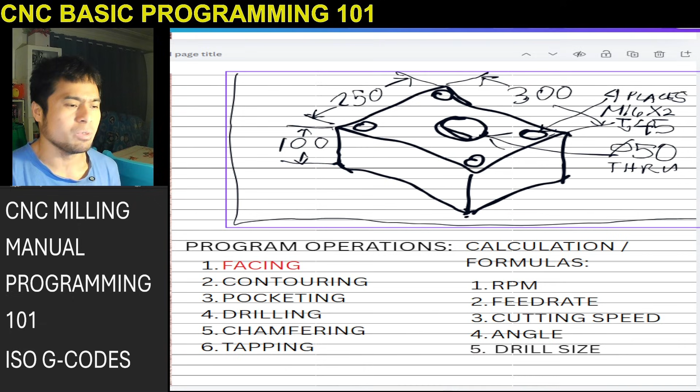I just found out that when you're just starting, it's hard to ask actually, there's nothing wrong in asking, but it's hard to ask your fellow machinists all the time because first we have a target or quota in our production, and there's no time to always ask your colleagues. That's why I find these ways to share this knowledge at least to anyone who is willing to learn about CNC machining. I just strived that time to really learn how. When I was starting, I just really had to find my own ways to learn CNC machining. I would say like that.

That's why when I have this kind of willingness and spare time, I really started to share this kind of information so that those machinists who really want to learn CNC machining or programming, at least we have this kind of information in the internet. And that's why I share it, like I'm putting myself in the place of someone when I started also 20 years ago. So that's why, as long as I can, I use my own terminology so that they can also understand this kind of knowledge. That's why some of the terminology here I use my own, because I'm just thinking, as I explained in my previous videos, that I'm imagining there's a new machinist coming into the workshop and you will teach him about the machine controls and especially the program. So that's why this is how I teach someone who is just new in the workplace.

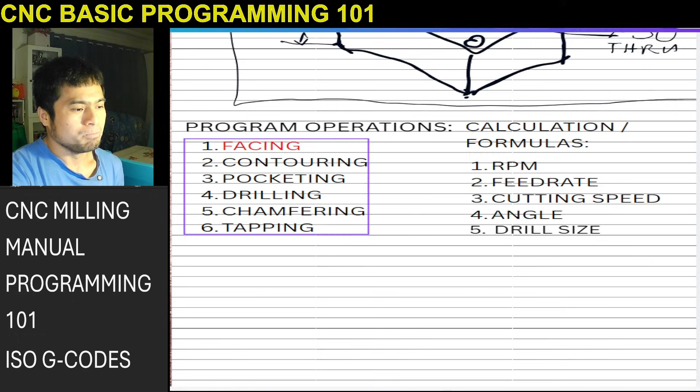So let's go back to our tutorial for today, which is contouring. Since we already tackled some of the program functions, codes and characters, I just did an initial format. Just to recap from our first video, which is the facing operation, this is from block number 1 up to block 25. That is our full program to face this kind of material, 300 by 250 by 100. That's why I labeled it N1, which is facing operations.

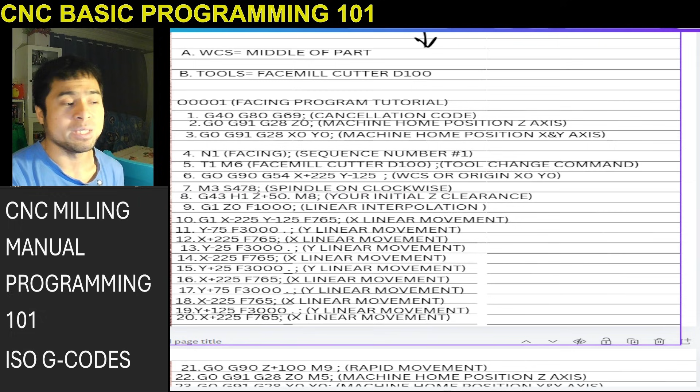So now, if you will do the next operation, which is contouring, you will just insert it onto the bottom part of this one. The M30 is supposed to be removed. Then you will insert the next contouring operation. That's why I labeled it this way, I just copied the drawing so it's already there. It's hard to scroll back again to the very top of the page, so I just copied that one there. Now, program operations episode 2, which is the contouring operation.

What is contouring? Contouring is, after we face that material, simply cutting that width, the 300 by 250. Because of course, when the material comes, there's always stock around the material. For example, if this material is supposed to be 300 by 250, that is not exact. It's always a material stock from the cutting process. So probably that is 310, this is probably 260, ideally, for that kind of material.

So there's always stock, even to the thickness - if that is supposed to be 100 thickness, it's not exactly 100. It's 105 or 110, like 5 mil each side, ideally. That's why the contouring operation is finishing that square, the outside part of that part, to target that dimension, 300 by 250.

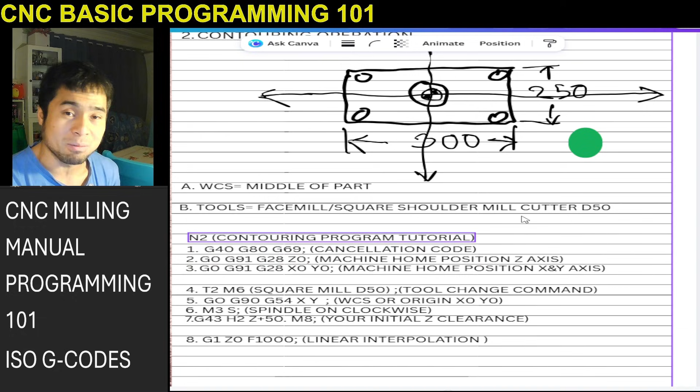Okay, so I already typed some of this first, because we've discussed this in our first tutorial in the facing part, which is episode 1 of our tutorial. So I just put it right away. I put N2 and labeled it as contouring program tutorial, because this is our tutorial, but you can put anything - contouring operation or whatever detail you want to put there, just to know that this part is contouring.

N2, which is the sequence number, we have already discussed that one. Sometimes if you reset your machine and want to jump right away to the contouring part - of course, when you finish your facing operation, which is this one from N1, when you reset your machine and rerun the contouring, you will not run again from facing. You just want to jump right away into the contouring part. That's why, to jump to this side, you can use N2.

You can use N2, which is the sequence number 2. That's one of the uses of N2 - you can just search N2, then jump right away here, and skip the facing operation.

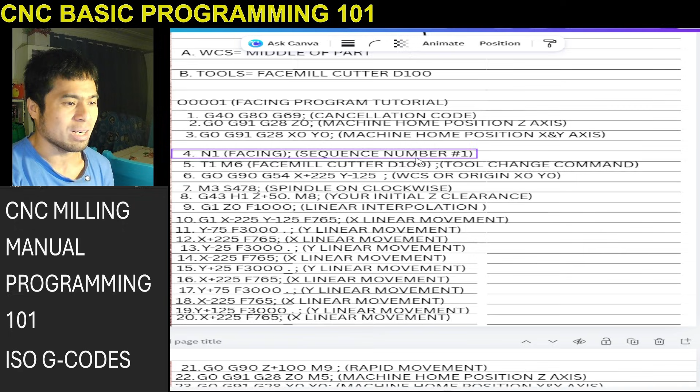And G0, G91, G28, X0, Y0, home positioning. Now, because tool 1 is our diameter 100 face mill used in our facing operation - if you remember, this is tool 1, face mill cutter 100, that one in our facing operation.

So now we will use our tool 2 as our square mill. Tool 2, M6, square mill diameter 50. So now, when the machine reads block number 4...

If tool 1, the diameter 100 from facing, is inside your machine, and your magazine is at the back, then when the machine reads this tool 2 M6, tool 1 (diameter 100) will be brought back to the magazine at the back, and it will get tool 2, your diameter 50 square mill cutter.

Then of course, G0, G90, G54, which is our coordinate or WCS, our origin or work offset. So what is our X0, Y0? If this is our 50 mil, and this is 50 mil, and 250 and 300.

250 divided by 2 is 125. So 125, plus what is half or the radius of our cutter? This is diameter 50, plus 25, because it's 50 diameter, so half of it is 25. 25 plus 125 equals 150. But you will not put exactly 150, because you still need a small clearance.

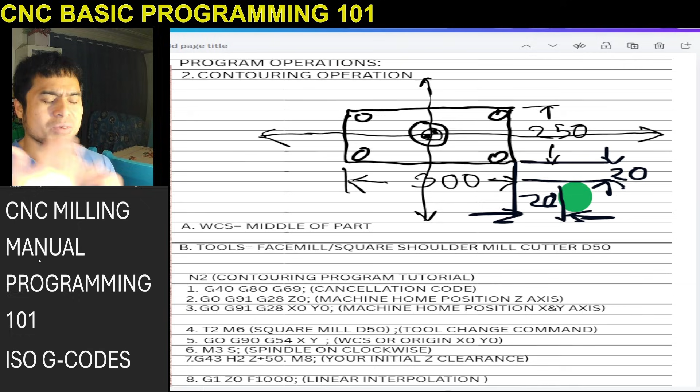So that's always also 20. We will just go standard 20 gap. This is also 20 for the X, just to show you that kind of clearance. That is just still clearance - you can put 10, 10, 5, but ideally just put enough clearance so you will not be very close to the material. So just put 20. We'll erase that one again.

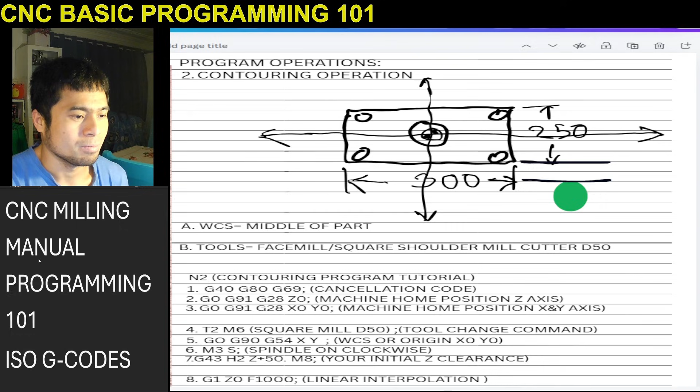So our tool is here, so Y negative 170, right? So now our Y - why did I do the Y first? I should do the X first. But anyway, Y negative 170.

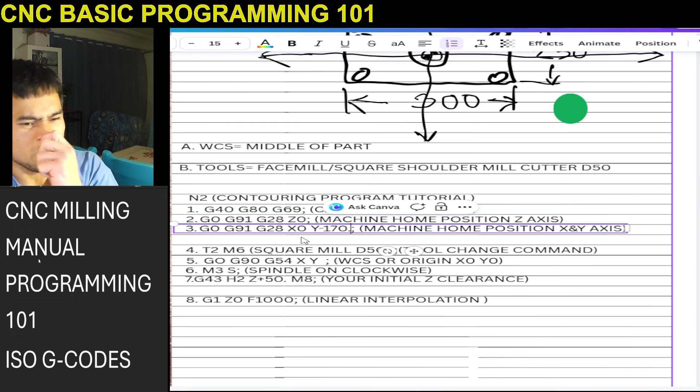Let's just compute it as 170.0, so that it's realistic. Or anyway, always put the decimal point, because some machines, if you don't have the point, it is considered as microns. So always put the point. And let's compute the X.

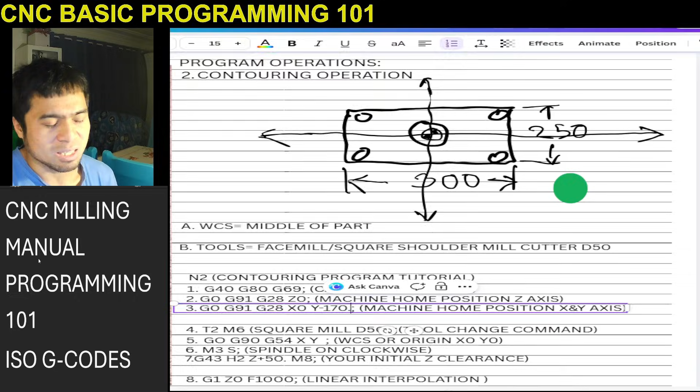Let's compute the X, which is 300. Half of that is 300 divided by 2, how much? 150, right? So 150, which is half of 300, plus half of our radius of our tool, which is diameter 50, so radius is 25. Plus 25 equals 175, from that middle to the edge of this X.

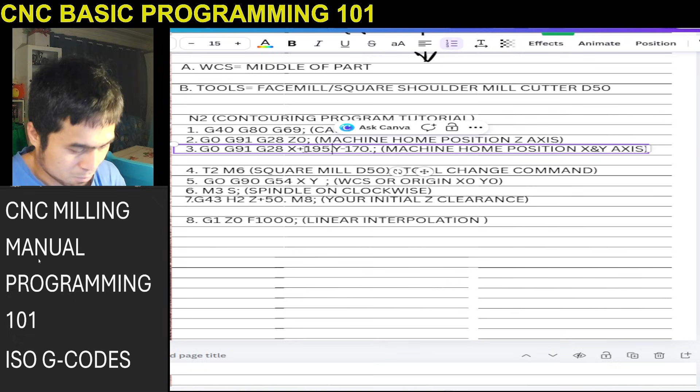But because we still have 20 mil clearance, that is 175 plus 20 mil equals 195. So that is just 195. So we will put X positive 195, Y negative 170.0 - let's just put the 0 so that it is realistic.

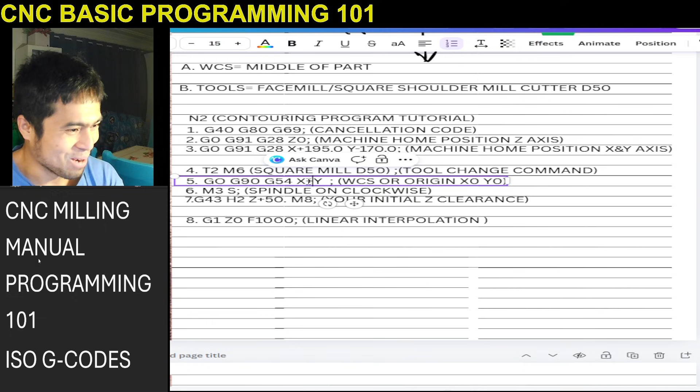So basically, when the machine reads that - why did I put it there? That is home positioning. I'll just transfer here. I was already blind. 195.0, Y negative 170.0. Why did I put that in the home positioning? This is 0.

Okay, so it should be there. It should be here, not there.

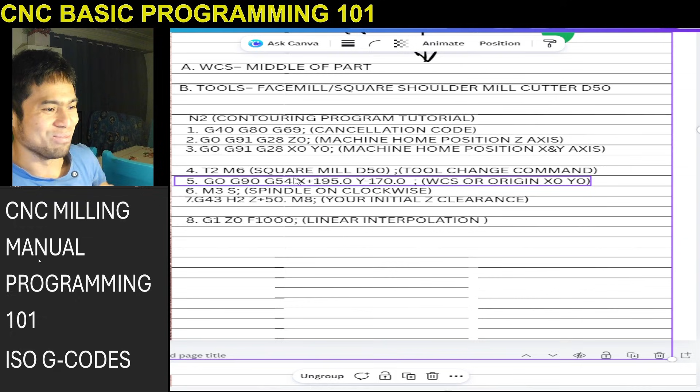Anyway, so when the machine reads this, if your tool is still far from the reference position, because you put Z0 and X0, Y0, it will just go to the home position. Then it will call the machine, tool 2, M6. So from the magazine, it comes out and returns tool 1, which is diameter 100.

Then when the machine reads block number 5, which is G0, G90, G54 X195, Y negative 170, with 20 clearance on both X and Y. So basically, approximately, your tool will be somewhere here. From that positioning, there is 20 mil on that Y and also 20 mil on that X.

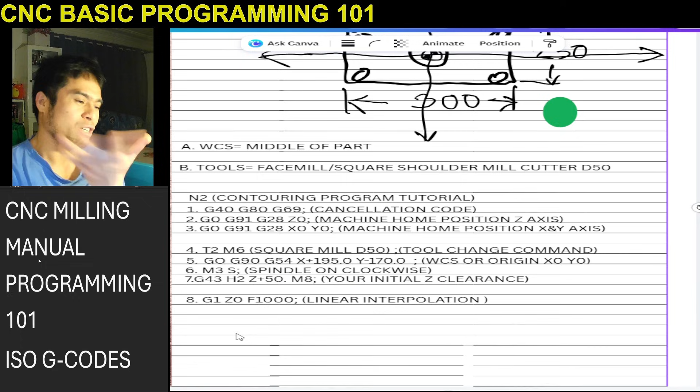So now, of course, we will be computing the next one, which is M3. We will be spinning our spindle. M3 is spindle on clockwise and spindle speed. What is our spindle speed? So of course, we will be computing now.

We already tackled that one in our previous tutorial or video, so now we will just quickly calculate that. The formula for computing RPM, which is spindle speed, is—let's go back, the good thing is we saved our tutorial here from our first topic. So we still have the formulas.

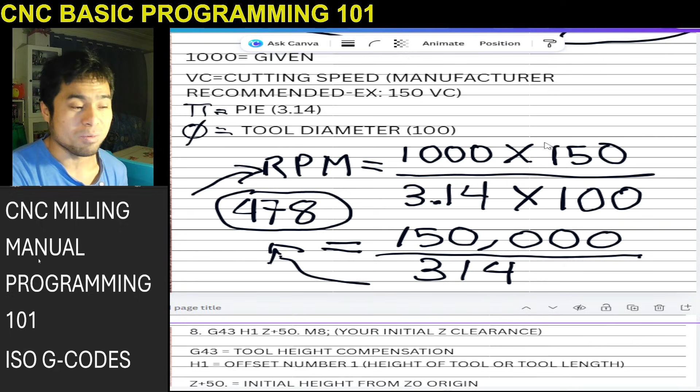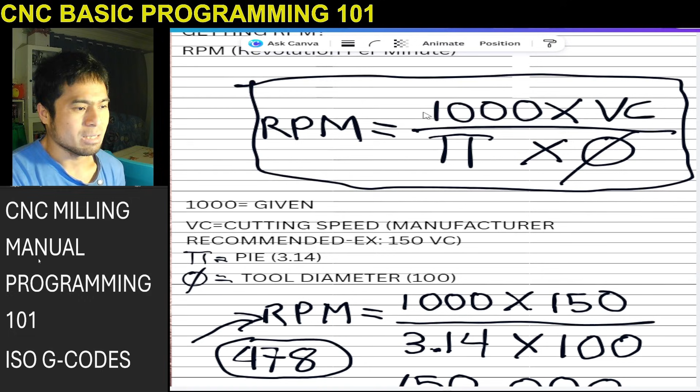RPM equals 1000 times 150. 1000 is given and 150 is the VC. So let's use the same VC, which is 150, divided by 3.14, which is also constant, times the diameter. That is the formula: 1000 times VC divided by 3.14 times diameter. That's why in this example it's from diameter 100.

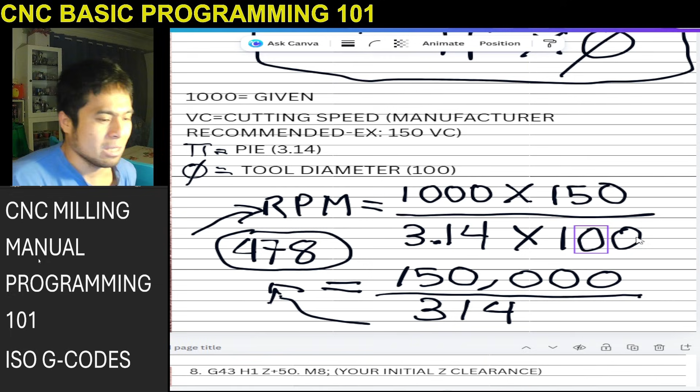But let's compute if we use the same VC of 150 and the diameter is 50. Given this formula, let's calculate that. So 1000, and we will find what is the RPM of our diameter 50 cutter.

1000 times the VC—let's use the same VC, which is 150. So of course, 150,000 divided by pi, which is 3.14, equals 47,750, then divided by 50. So our RPM or spindle speed is 955.

So we will now use 955 here in our spindle speed. If you missed some of this part and don't understand, just go back to our previous discussion. I discussed it in detail, block by block, on that specific topic on how to calculate spindle speed. So 955 with 150 VC. M3 is 955 for the diameter 50 cutter.

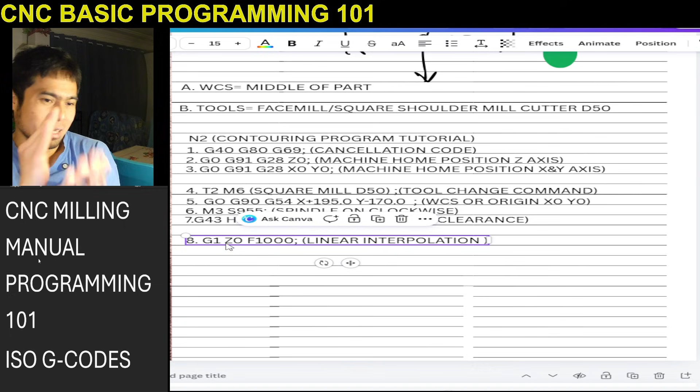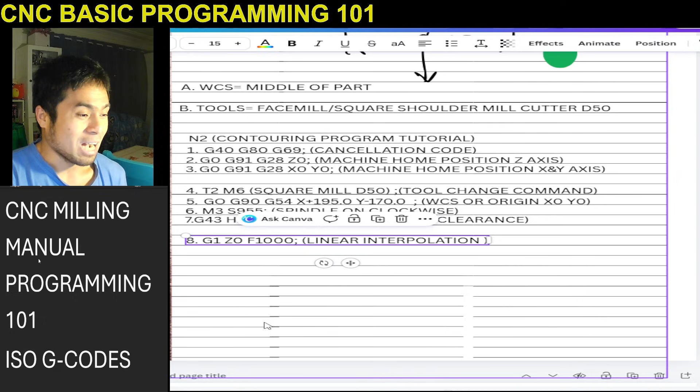So now, block number 8—I just put a space there so that at least we can label each block separately, that's why every part I put a space. So 8 is another block, that is now where our cutting will start. So G1, which is linear interpolation, Z0 feed 1000. So from 50, it will move to Z0 at feed 1000, something like that.

Imagine, okay—I will first do the one whole rotation. I just don't know where I'll start because there are two parts of this tutorial that are new to you. So I think we'll discuss first the one whole rotation; I just want to cut one whole rotation first, so that our tutorial for today's video doesn't get mixed up with other parts. So I'm just planning to go one time around, so that I can explain the proper movement on that.

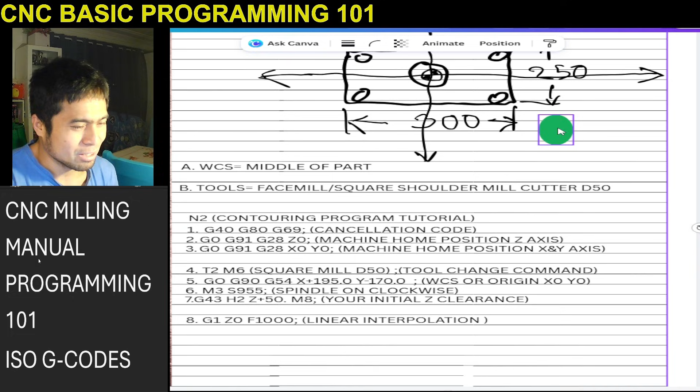So Z0, on that feed rate 1000, so the tool will go to Z0. Then, when the tool goes to Z0, of course the tool is here. So the first thing to do is go on that Y, because we will be cutting like that, okay.

So now, to make your program much easier to read, I will repeat it again - to make it more easy to program, just program based on the drawing.

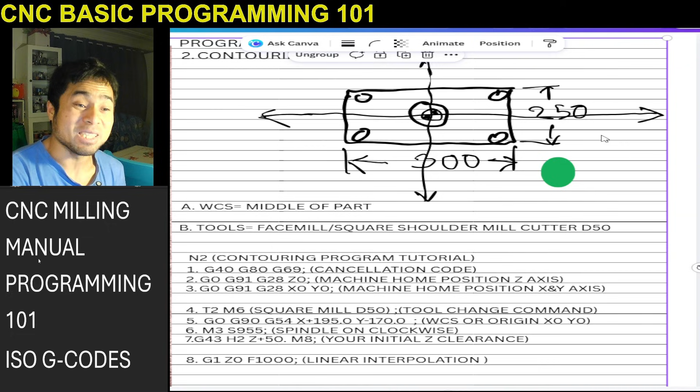I'm thinking how I will explain it. But basically, when you do the program, if you notice, based on our previous program from facing operation, I calculate, for example, this position negative 125 plus 50. And I consider that half of the tool, half of the tool in our positioning, in XY positioning, when we do the zigzag. Do you remember that in our first operation?

But now, when you do contouring, you just disregard that half of the tool. Disregard that, because there is a function called tool compensation, which I would like to share with you in this video. Remember to disregard the half of the tool, the radius of the tool. We will be making the program based on the drawing.

If that is 150, make 150. If this is 250, make 250. How will we do that? That is called tool radius compensation, okay?

So tool length compensation means - what is tool length compensation? I just want to highlight, I think probably somewhere here. What is, not tool length compensation, tool compensation. What is tool length compensation is G43. So this is called tool compensation, not the length.

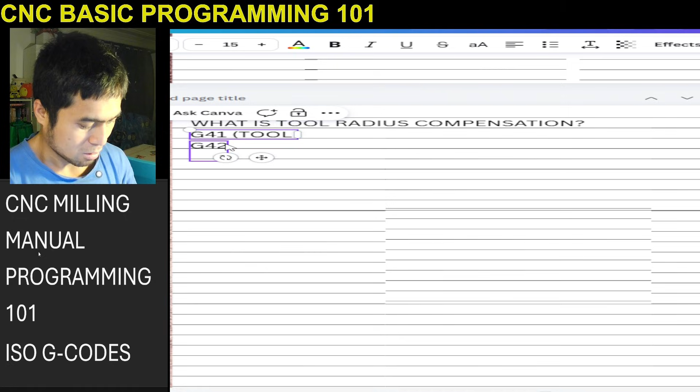Tool radius compensation consists of two G codes, G41 and G42. G41 means tool radius compensation left, and of course G42 is tool radius compensation right.

So in the real world, similarity or example - G41 tool radius compensation is left, this is you, left, this is you. And tool radius compensation right is your wife because always right - no, just kidding. So meaning, tool radius compensation left, this is the tool direction when you cut the material, left and right. So how did we explain that so that you can easily understand?

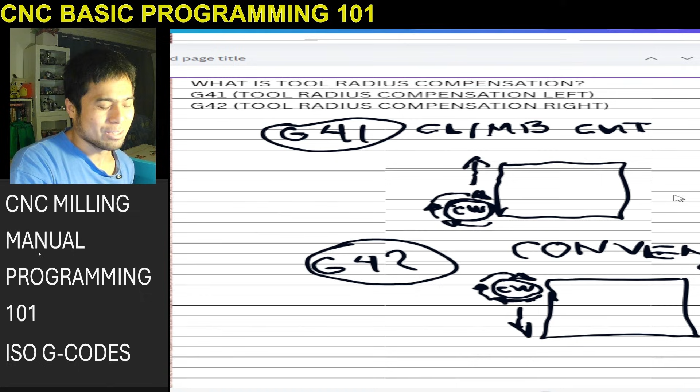How can I explain that? But if you see in our illustration, it is obviously on the opposite direction, right? So most of the time, we're using G41 in our machining. Especially on our contouring, you will be moving, going to the right, and you're on the left side, which is, we will use G41, which is the climb cut.

Can we use G41 and G42 on this both illustration? Yes, of course. If you want to use G41 in your contouring operation, you will be moving, going to the right. So you will be moving like this, going to like that, clockwise. But if you want to use G42 program, you will be moving, going counterclockwise. I will move this cutter here

So that you will understand more our illustration. So this is our cutter, right? It's rotating clockwise. So G41 will be moving like that. It will cut the side of the part, which is the 300 by 250, going like that. But the G42, even you're starting here, the G42 will be moving counterclockwise. Something like that. Okay?

So it is up to you which one you will use, but most of the time we're using G41, which is the tool radius compensation left, and just very not always, we're also using G42. When you program your part, the default is always G41. But there's nothing wrong in using conventional as long as you understand how it works. And you also know that when you use G42, it's not producing a good surface finish than the G41.

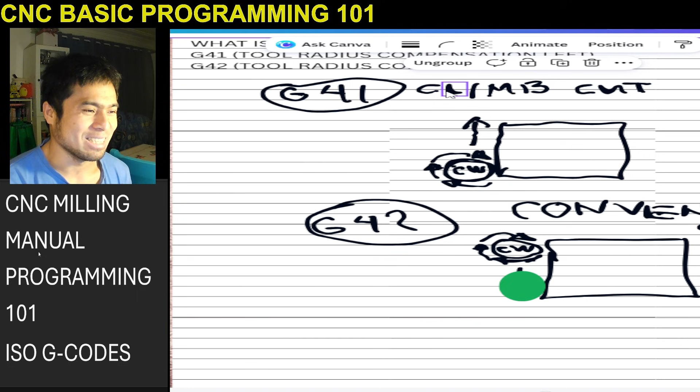It's really hard to explain this G41 and G42, but once you encounter it or use it in the real machining program, you will understand. I just don't want you to get confused that G41 is on the left side and G42 is on the right side.

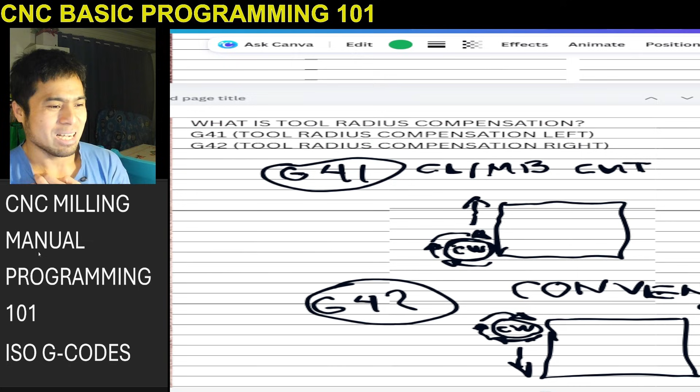It's not the right explanation, although it's named like left and right. That left and right is talking about the compensation of your radius. That's the reason why I told you to disregard the radius of your cutter, because we will be using compensation, meaning we will be putting exact dimension of our drawing.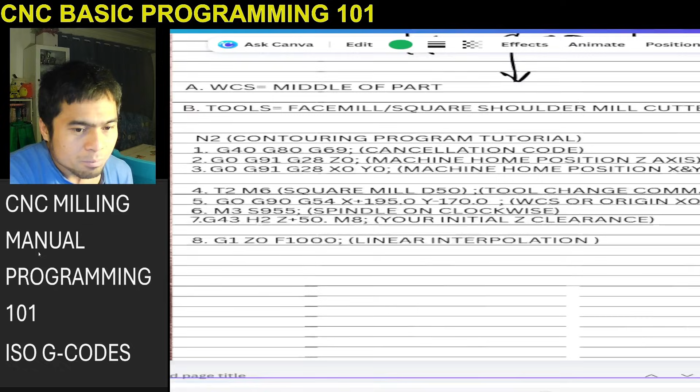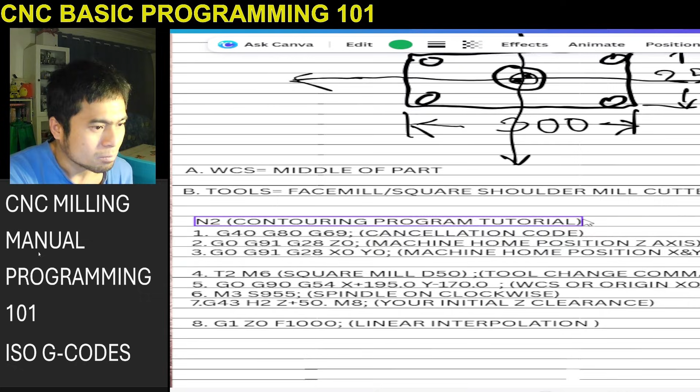Why my illustration... okay, but why it doesn't appear here, the program? I think it's short on our right side. It is short. Why is it short?

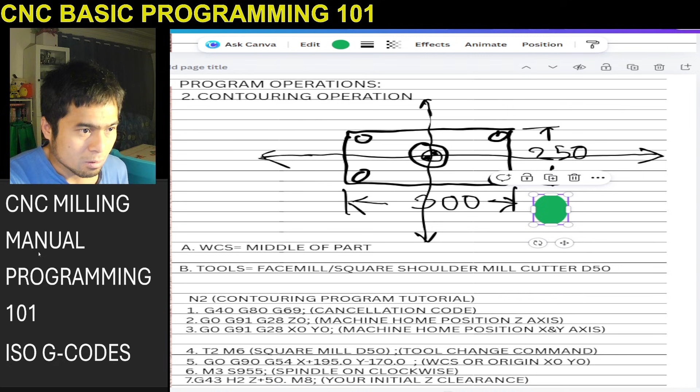I will just fix this, guys. Just wait a moment. I'll just want to fix our... okay. Why did I... okay, but anyway, we're still not discussing the full movement.

So I think it's alright, although we just covered this part a while ago, but anyway that's alright. Meaning when we do the program, we just put exactly what's the value based on the drawing, because we will be using that tool radius compensation and set that one in our machine. Let's just do one example so you can understand how it works.

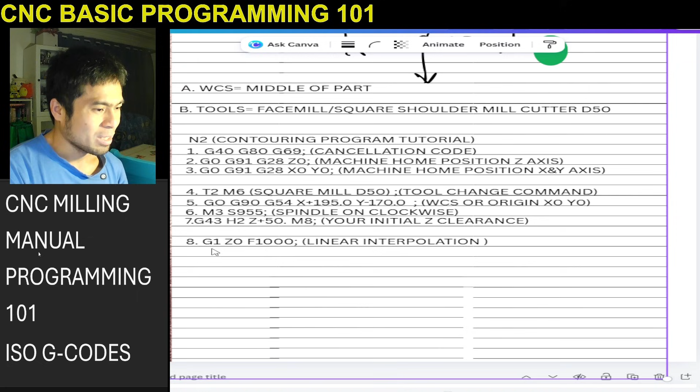So when we do G1 Z0, it just goes to Z0, block number 9, it will go... this one will go Y. This should be Y, 9. G1 Y.

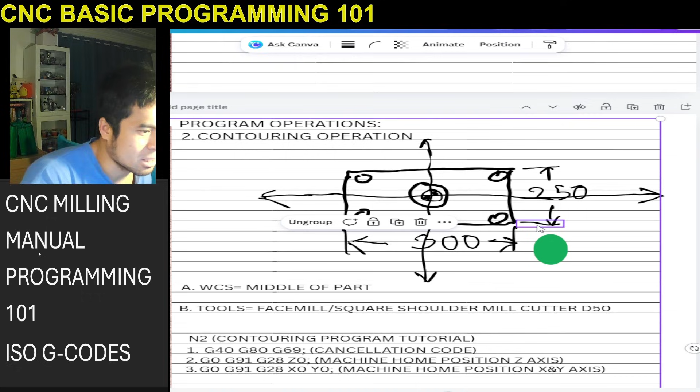So G1 Y, what is the value of this? Y, 250 divided by 2, of course, 125. So Y negative 125 because we will be moving this one here. But if you notice, Y negative 125, because our value is always on the middle of the cutter, so the cutter should be supposed to be here, right?

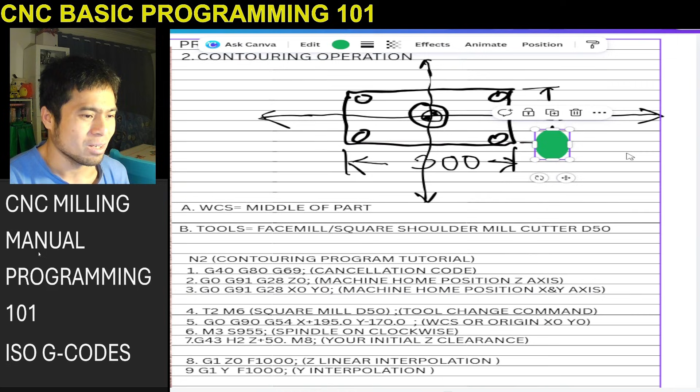But it will not go there because we will be using G41, which is tool radius compensation. So this one should be G1, G41, Y negative 125, D1.

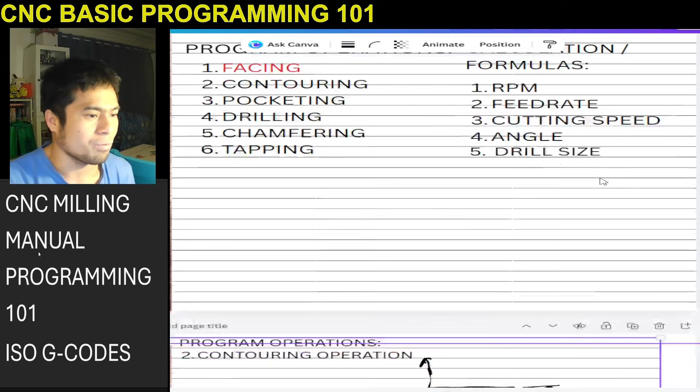And feed, what is our feed? Let's calculate. We will explain that one later on. Let's calculate the feed first. Okay? What is the formula in calculating the feed rate?

Feed rate equals RPM, which is 955, times feed per tooth, which we will use still the same 0.2 based on the manufacturer. By the way, this explanation is also in our previous tutorial. And of course, the number of flutes. Let's say number of flute is 4 flute only, 4 flute end mill, okay? And 4 flute

square mill cutter, okay? So go back to our calculator, which is RPM is 955 times feed per tooth. Let's use the same 0.2, let's say that is the manufacturer recommendation, 0.2. That is FZ, okay? In your tool insert, when you buy insert, you will see the label FZ equals 0.2 to 0.3 to 0.5. So let's use 0.2. 0.2 equals 191 times the number of flute. Let's say per flute, diameter 50 square mill times 4.

So our feed rate is 764 on our diameter 50. Okay? So what is that again? 764. Oh, the same, almost the same with the 100. But because 100 is 8 flute, but in our 50 face mill, it's just 4 flute. So that's why it's almost just divided by 2, almost the same with the 100. So feed rate 764, okay? In our 4 flute diameter 50 face mill, square mill, the feed rate is 764 and RPM is 955.

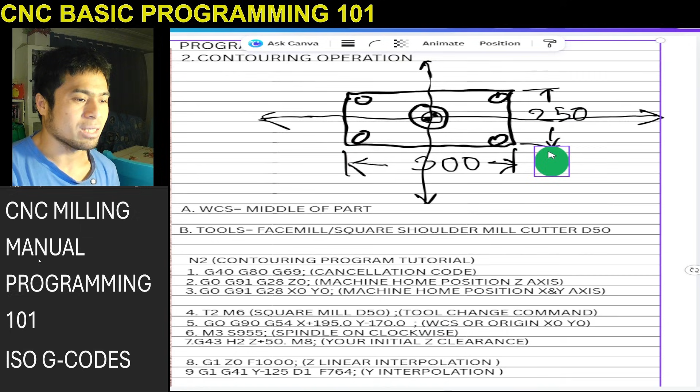Where are we going to set that radius, the 25 mm radius of the cutter? We will set that one, as you notice here, G41, G1, G41, Y negative 125, which is based on the drawing. We will set that radius in D1. Where is that D1? That D1 is still in the tool offset where we input our values.

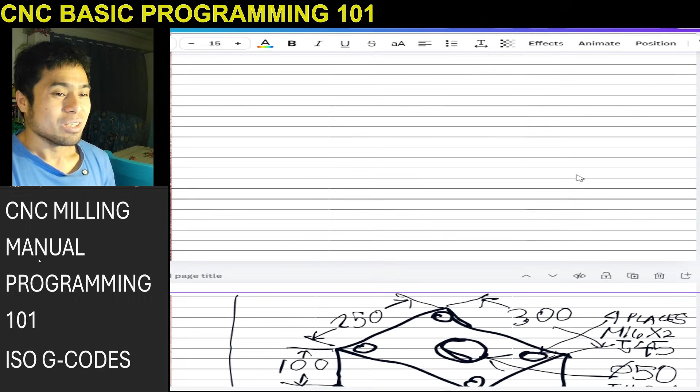Remember in our previous tutorial, in our G43 tool length compensation, we go to tool offset, we will find here. We go to tool offset, right? The same when you see your monitor, just find the tool offset button and you will see this field. Previously, we put the 200, which is the face mill cutter 100, in H1, right?

And 50, the radius. Now in H2, for example, our tool length of our diameter 50 cutter is, let's say 150. Let's say 150. The H2, we are in H2, right? This is the diameter 50. So put that 150 tool length here, which is the length side.

Geometry. And where? Of course this is just 0 because you will not make an adjustment to the height. You're not doing the facing, so the height adjustment doesn't matter. So if your tool length of your 50 diameter cutter is 150, put it here in the H2 side, which is length.

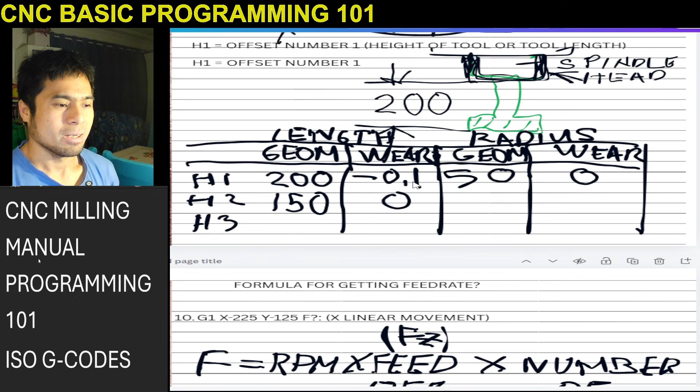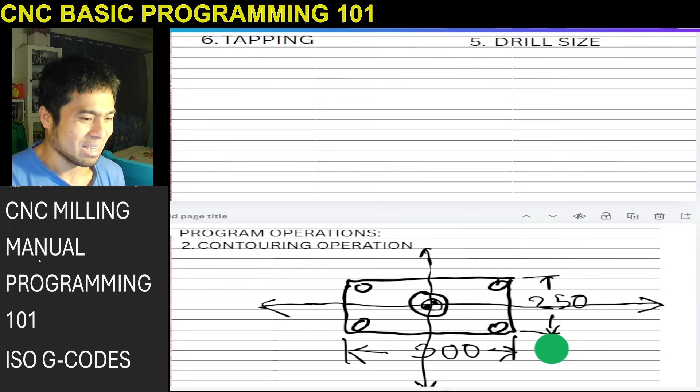Now the radius that we define in tool radius compensation, actually I made a mistake. This is not D1, this is D2. This is D2, sorry. Go back here. But you can assign any D1, D2, D3.

But ideally, same as in H1 and G43, which is H2, T2, H2, of course you will not get confused yourself. If you use H2, so use D2 also, so that you will input that D2 the same in line with the tool offset in your machine.

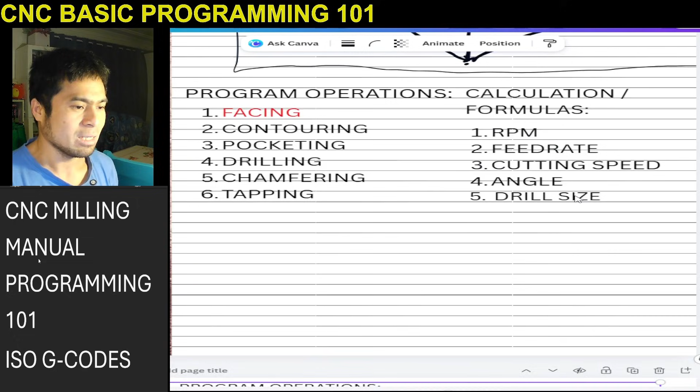Okay, so go back again here in our illustration. When we input the value of the tools, put 150 here, which is the tool length offset, which is the G43 explanation of the tool length offset, which is here. The same with the 200 in our face mill cutter, and 0 in wear.

And the radius, which we define in D2, that we use G41, that's why you have to input here on this side. You have to input here. Radius of our tool, diameter 50, so radius is 25. But why there is no... yeah, radius is 25. Of course, wear is 0 because we don't have adjustment.

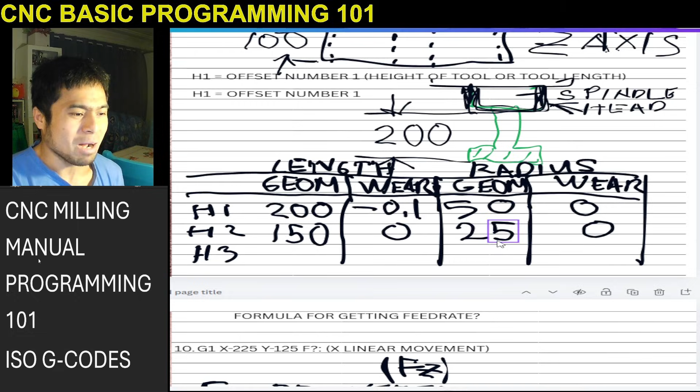So now this is very important, that you have to put 25 there. Because whatever is the value there, radius, meaning radius here in your tool offset in your machine, whatever is the value there, that is the value that will compensate on this program. When the machine reads this, G1, G41, Y negative 125, D2, it will compensate whatever you put in D2, that value.

If you put... so that 25 is, ideally the machine knows that the D2 value is 25 mm from that point to the center of your radius, that is 25. You have to put it there.

If you mistakenly put a different value, for example instead of putting 25, you put 35, that's not good ideally, but it's still okay because that is far from here. You have a 10 mm mistake, so it is far, it will not go a long way there. But if you put less than 25, for example you put in your D2 15, it will go 10 mil inside. Imagine that. So that radius should always be correct based on the radius of your cutter.

Okay, I just exaggerated it so at least you know what that value really means, which is very important. And of course, go back to the tutorial, to the machine, which is this side in the geometry, in the tool offset.

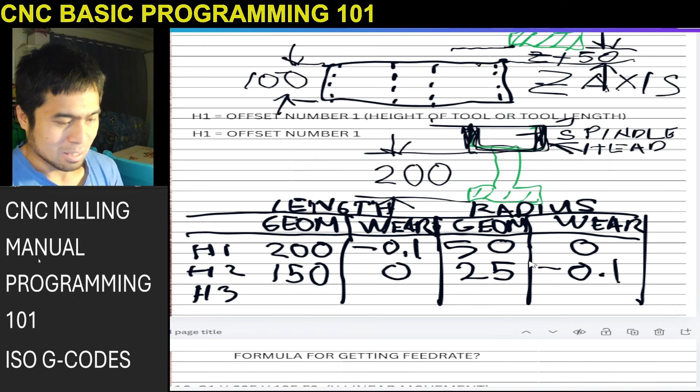Remember when I discussed that if you mistakenly put 35 instead of 25, your tool will go far. If you put 15 instead of 25, your tool will go near, because the machine thinks you are smaller when you put the value less, so it will go more. Same way in wear: if you want to cut more, put negative, because it assumes that the tool is smaller than 0.1.

Put negative when you want to cut more, and positive when you want to make your part bigger. That's why ideally when you do the first cut, always put positive in your wear, like positive 0.2 or 0.25, so you still have the opportunity to measure first and adjust incrementally until you get the final dimension. So for the first cut, always put positive in your wear, and until you get the exact dimension, you adjust incrementally, going smaller and smaller in that wear adjustment. Hope you get that idea.

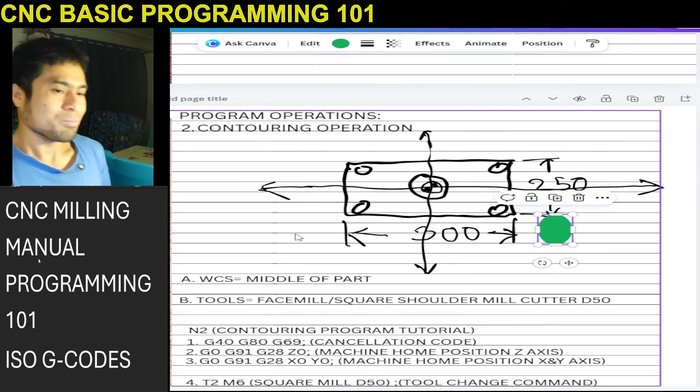Now, of course, the X movement will just copy that one, Control B. This is number 10. Just because G41 and D2 are modal commands, you don't need to put G41 on the next line. And also G1, don't put it, because that's also a modal command we discussed last time.

So just put the value of X, and don't put D2 also. And the feed rate, just remove that one because the feed rate is still the same - we will still be using 764. So, linear.

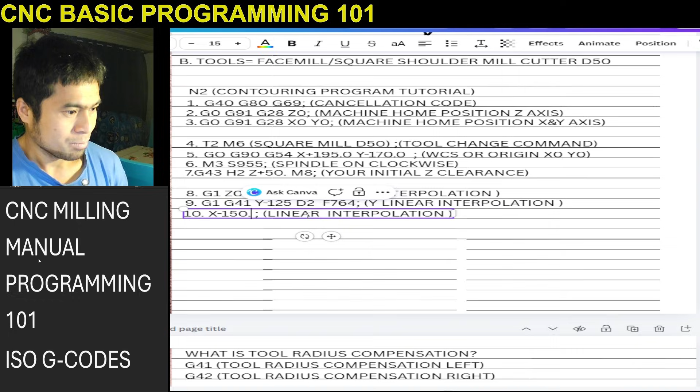So X is negative. What is our X? 300 divided by 2, so X negative 150, okay? X negative 150. So the next one, X negative 150, it will cut here.

So the tool is here. Why negative 150? Because our D2 is still activated. So the actual position on the machine is not negative 150 - it should be negative 175. But when you do the program, you have to put exactly what's based on the drawing, so the machine will calculate automatically. It will calculate half of the diameter because of that D2, the G41 calculation.

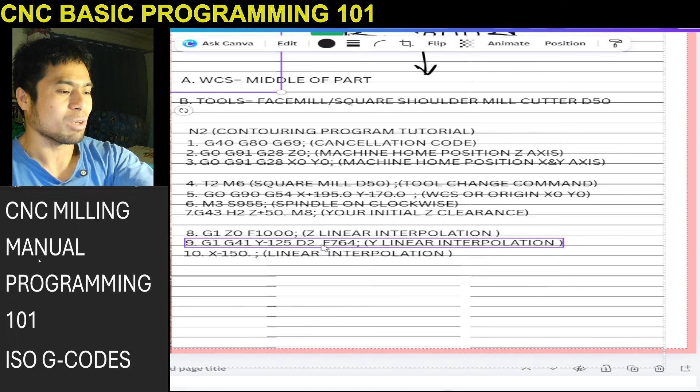Okay, so now that our tool is there, we will be moving again in Y, going there again. Just put number 11, that is Y, Y positive 125. Let's put 0 so that it is very realistic.

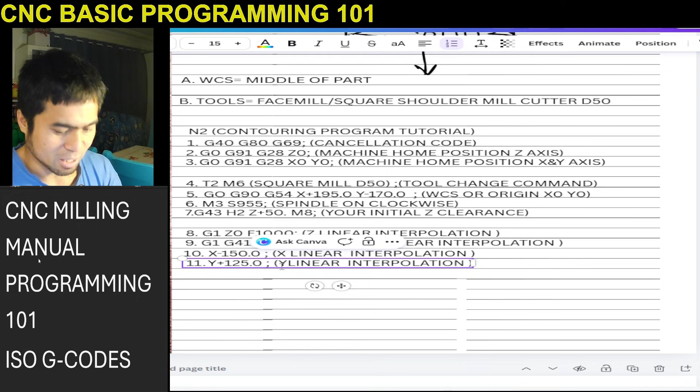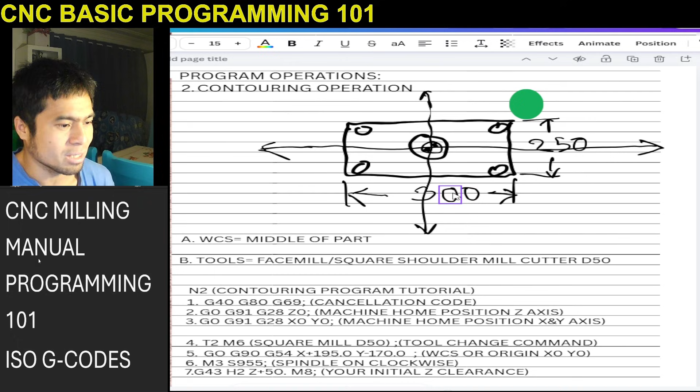And that is X linear interpolation and Y linear interpolation. So it goes there, Y positive 125, so the tool is there. You will go here again - of course that is X 150, because half of 300 is 150, and Y 125, because half of 250 is 125, right?

It's on that corner. So now we will just copy this X. This will become our number 12. But this one will become positive 150 now. So the tool will go there, positive 150.

Now the tool will go here again in negative 125. Yeah, negative 125. Okay, so copy.

I will not put negative 125 there. You know why? Because I will explain to you later. Instead of negative 125, I will put now the first positioning that we have.

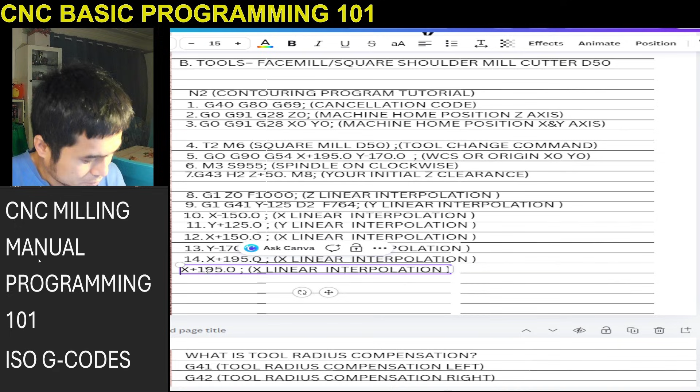I will explain to you the last three part of this movement, okay? The last three part, why I put like this. Probably just 200. Positive 200. G40.

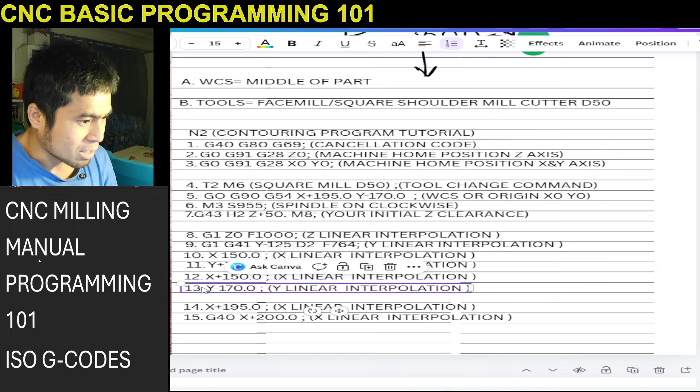Now, you see this last three blocks? I think I'm going to separate it just to highlight, and you know that it is important, this last three blocks.

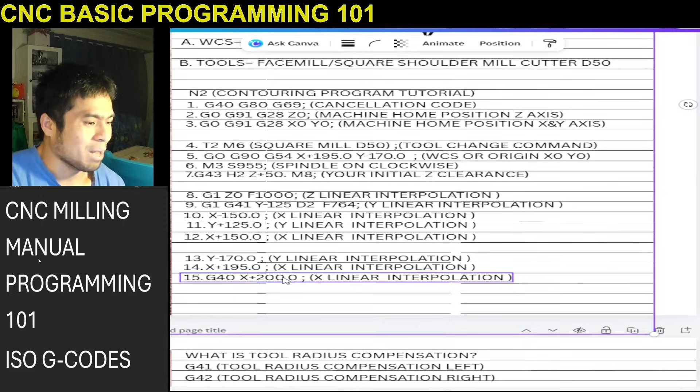Now, go back to this movement after we move X positive 150, which our tool is already here. Instead of going here, which is negative 125, I use negative 170 now. Because that is our first positioning, right? Here in G54, 170, and we have 20 mm clearance from that. So basically, that one will read here.

And also that number 14 block, which is X195, that is also the first positioning that we have. So basically, it will move somewhere here. There is also 20 mm clearance. Understand this one, guys. This last three part.

This is very important. I also do X195 here, that positioning, okay? Then X200, I just moved X200, G40 X200. So probably if this is X195, it will just move 5 mm more, only just a little bit.

Why did I put that? Why did I do that? The question is, why did I do that? Because I explained that in G41, it will compensate the radius.

So basically, if we will follow this 170, that 170, or if I just want to go that one, I just supposed to put 125, right? Like that. Or if that is 170, 125 is somewhere here already, right? That is the edge. So 170 should be very far here, probably. Because 125 plus 170, it's very far, probably. Then X is very far also.

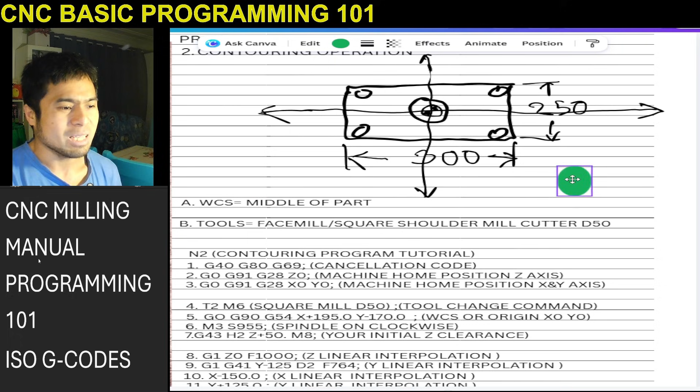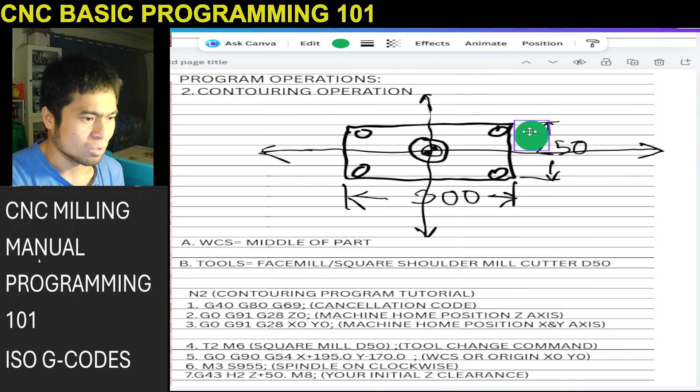Because my G41 is still active, right? The tool compensation, which is half of the tool. But ideally, the G41 works like this. The last three blocks of your exit, the exit of your tool. The G41 works like this. So we're here, right? Understand this one very well, because this is the very important part when you do the program in G41.

The G41 works like this. Even the G42. When you cancel the tool radius compensation, the activation of G41, the tool radius compensation is G41 and G42, right? That is the activation. That's why it requires D2. You see this block number 9, right? But when you cancel it, the cancellation is G40. See? See this in the bottom, G40.

But G40 or the cancellation works not exactly on the same block. I will repeat it again. The G40 or the cancellation of G41 or G42, which is the tool radius compensation, when you specified it in the specific block, which is the 15, the program doesn't cancel exactly right to number 15 block. The program doesn't exactly cancel on that specific block alone.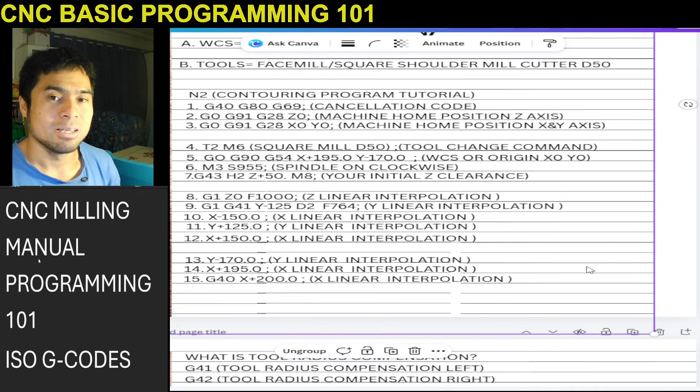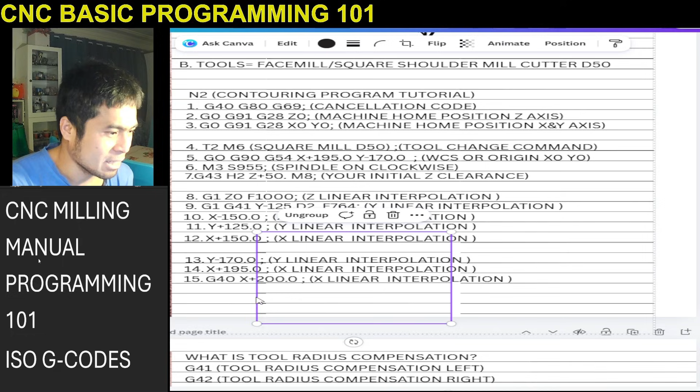The G40 or the cancellation of G41, it canceled the first or the last two blocks ahead. I will repeat. The G40, which is the cancellation of the tool radius, it canceled the last 2 blocks before it. That's why I separate this one so that you can clearly see that first 3 blocks. So meaning, in my explanation, that it canceled the last 2 blocks before this cancellation, before it reached G40, the last 2 blocks ahead of it is already canceled.

So meaning, even though the G40 was executed on this block number 15, the one I showed you, the number 14 and the number 13 was already canceled. So meaning, the tool compensation or tool radius compensation in this block number 13 and 14 is not anymore working.

It's not working anymore. That's why, as you notice, I put the actual value first in our first positioning because ideally, I will move this one here, right? So I can just put Y negative 125, so the tool is here. But because in the definition, the G40 works the last 2 blocks before it, so you have to put the exact value based on your positioning. Or whatever, you can put negative 180.

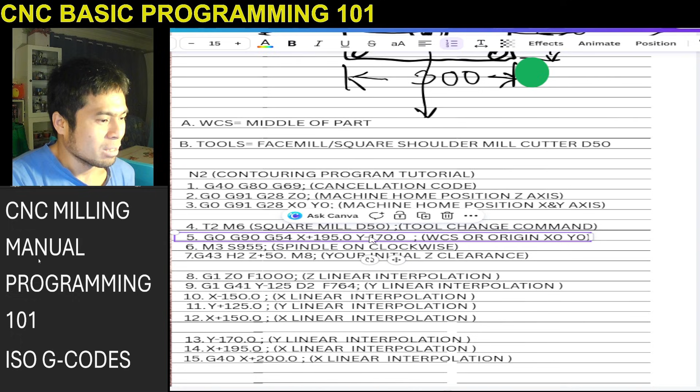Just remember that when you do the program, the last 2 blocks before cancelling the G41 were already cancelled also. That's why X195 is the actual positioning now. Numbers 13 and 14 are the actual positioning with 20 mm clearance. That's why I put the same positioning as our first coordinate, X195, Y negative 170, that is the one.

And I just put the G40 after that. I just moved at least 5 mil more. So from 195, I moved to 200 just to put the G40 after the 2 blocks. I can put the G40 here beside G40 X195. But remember, G40 cancels the last 2 blocks.

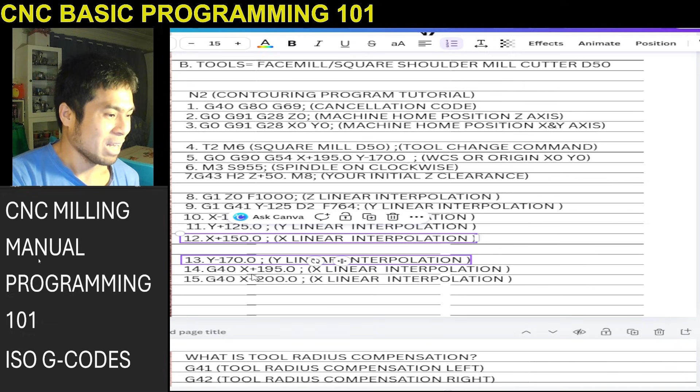So meaning, if I put the G40 here on the X195 instead of after that, for example I put G40 here, then the number 12 would also be cancelled. What happens if number 12 is cancelled? Basically your X150 will cancel the tool compensation.

So meaning your part will get rejected because it will go tapered. Imagine that X150 was also cancelled - the part would be tapered here. It will go there, it will go there, because it will cancel the last 2 blocks.

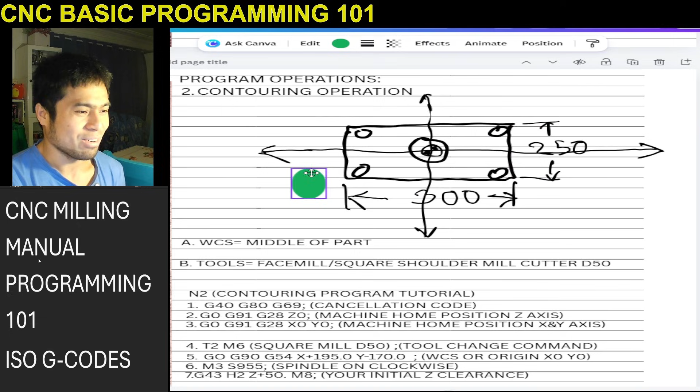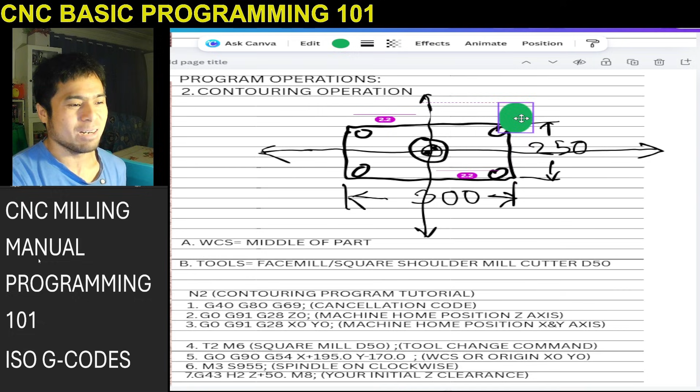And I encountered that kind of problem when I was starting to do that program. If you don't check your simulation very well, for sure you think you will produce a square or rectangle, but if you miss those last 2 blocks of your program and cancel early, you will produce a tapered part and your part will get rejected.

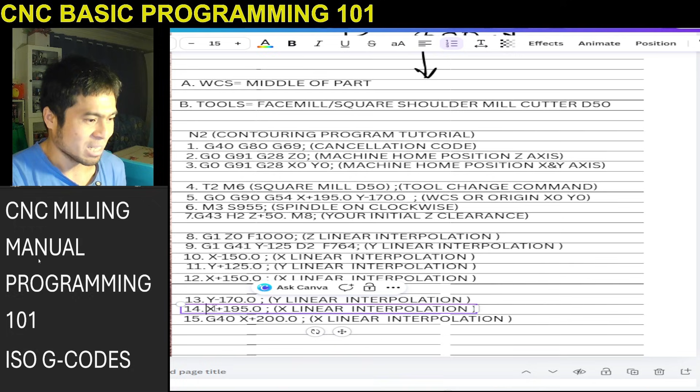Okay, hopefully you understand this explanation of cancelling the G41 or G42 movement. Because if you cancel too early, the last 2 blocks of your program will be cancelled before G40. So the proper way is to put the last 2 positioning, which is your X195, Y negative 170, as your last 2 blocks, and put G40 on the bottom.

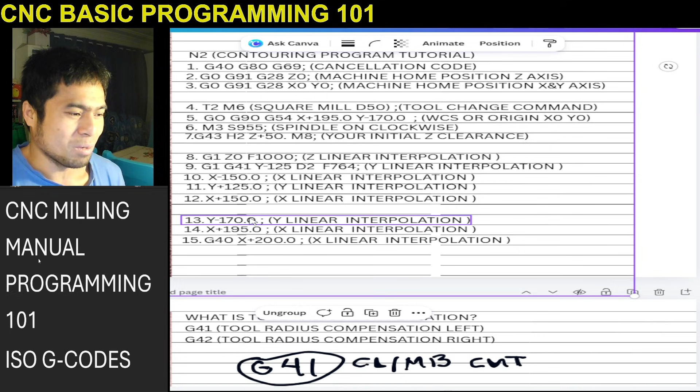If you want to put much more on the bottom, much better, because if you get confused whether to put it here as the last 2 blocks, just make it 3, so at least you're very sure you already exceeded the 2 blocks. I might get it wrong - probably this G40 is supposed to work here on number 14, and 13 is still the G41 still activated, but as far as I remember, it cancels the last two blocks ahead of it.

So it's better to make it 3 than 2, because if you cancel the 12 you will get a tapered side of it. It will probably look like that, because it will see that 150 is there, then it will go to 150 here, something like that. Hopefully I explained it well.

So that's how the G41 or G42 tool radius works. G42 is basically just moving on the opposite side. If this one is moving here as we programmed, right, it moves like that, so G42 obviously just moves going there. It's the same principle, and the same principle of cancellation at the end of the program applies the same way.

So that's the first part of our explanation in contouring using G41 in our program. But in our next video we will be discussing, because our part has 100 mm thickness...

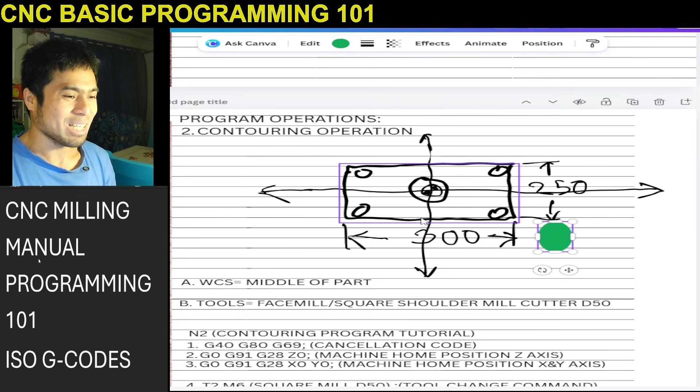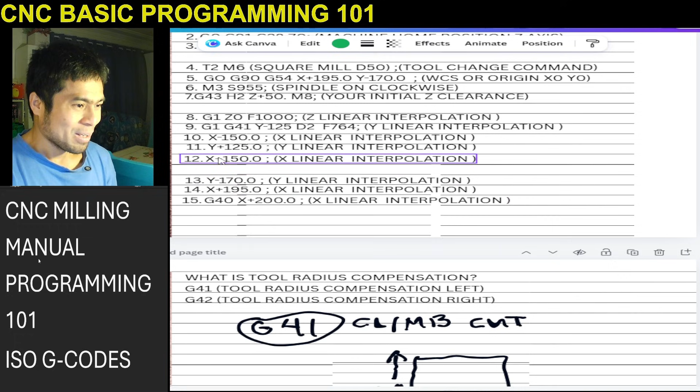Imagine if you will just keep on - we already made one pass, one rotation, right, with Z0 value. But if that is 100 and you will just go 1 mm depth of cut, imagine you will do this 100 mm, 100 times. So how long is your program? Maybe the day is already finished and you're still doing your program, right? So there is a technique for that.

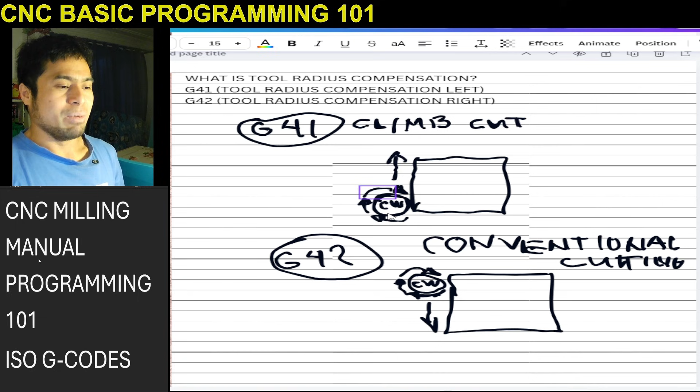So in the next video we will be discussing the technique of using repetition on that specific thickness, using the existing program we already have from this G41 explanation. So right now we covered G41 and G42, which is tool radius compensation left and tool radius compensation right - G41 is climb cut and G42 is conventional cut. Based on our illustration, hopefully you understand that one.